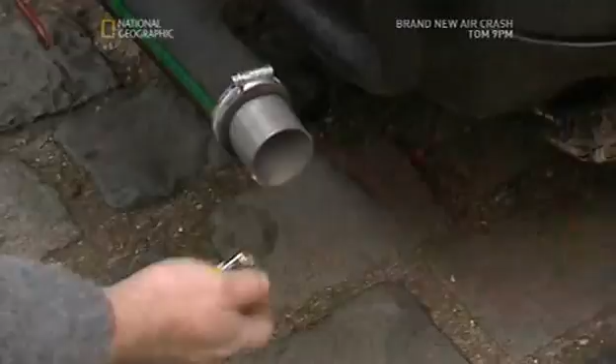But will they see the wood for the trees? Or simply get lost in the urban jungle?

There's nothing on the battery.

Dick Strawbridge is an ex-army officer turned eco-warrior. Jem Stansfield is an inventor with a wild green streak. Two men on a mission to fix the world, one mechanical solution at a time. Together, they are the Planet Mechanics.

Dick and Jem's latest mission has brought them to London. They've parked up their horsebox and have travelled to town on public transport. The Planet Mechanics don't want to add to the 260,000 vehicles that use London's roads every day. Most of these vehicles run on petrol or diesel, giving the capital some of the worst air quality in Europe.

But this group of people are determined to fight back. They're tackling pollution by planting trees. Trees for Cities is a charity that aims to plant 1 million trees in time for the London Olympics in 2012.

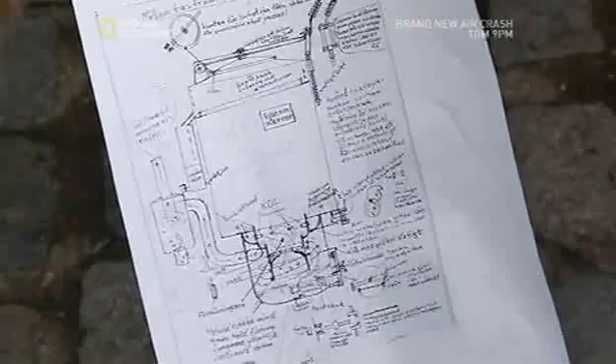Dick is feeling the pressure and is searching out some much-needed inspiration on the net. After a quick trawl, he's come up with a blueprint. But this plan does have one obvious drawback. Have you spotted it yet? Yes, the writing - it's Swedish. The chap who made this, it works, you know, this works as a system, but...

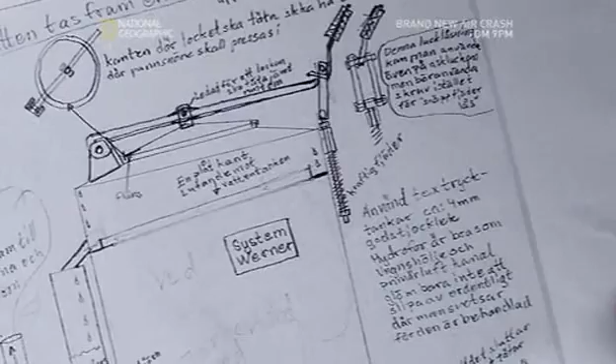There's a couple of things, Dick. It's got no dimensions on it. Oh, no, it doesn't matter. I don't know whether that's actual size. No, or whether it needs to be bigger.

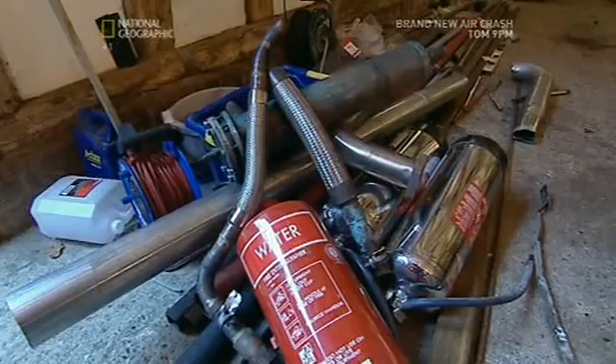Right, OK. So Dick and Jem have a plan in Swedish, a pickup truck and a pile of old junk. All they need to do now is build a car that runs on wood.

The Planet Mechanics have less than 6 days to make a wood gas pickup. And one half of the team is still in the dark.

Jem, I don't think you're overly convinced that we could get gas from wood, mate. I think it's brilliant, it just seems a little bit unlikely. But it's not that difficult. Look, watch this - it's a little cooking gas stove, a kettle full of wood.

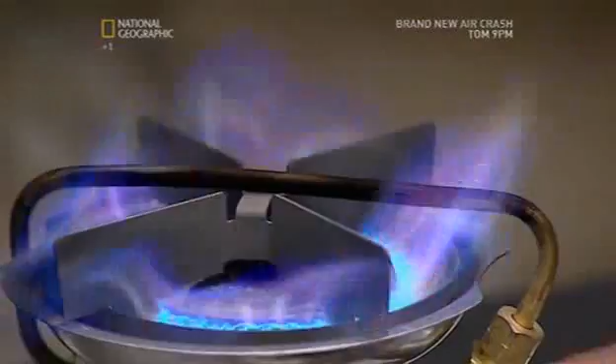OK, that's it. If this works, Dick, I'm kind of halfway to believing the car might work. What happens next? We wait for it to heat up and then gas will come off it, and then you'll be able to light it. Well, it's pointing at you.

Is this going to be the same with the car, though? You have to start it a day before you want to drive anywhere. With a bit of luck, we might get a bit more heat than we're managing here.

Right, I reckon we're nearly ready to try lighting that. Hey, look at that! That's properly amazing. I'm a complete convert to wood gas now. OK, that's a thing of beauty.

No, Dick, this is what we want. Hey, convinced? I'm totally convinced now. All we have to do is scale it up and run the car on it. A kettle scaler - I've heard of them.

Dick's proved wood can produce gas. But powering a pickup truck will involve a whole load more than filling up a kettle.

Day 2, and Dick and Jem are keen to get building. Trees for Cities are expecting the delivery of a green running machine for their big planting day at the weekend.

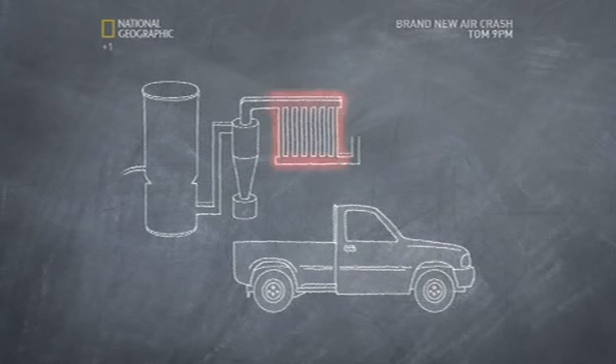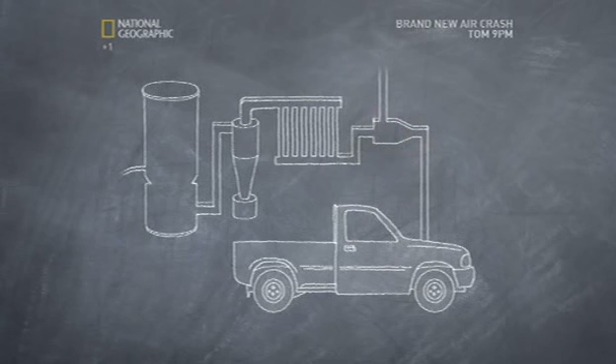First of all, they'll need to make the producer, a cylinder in which wood burns to produce the gas. Burning wood produces clouds of fine particles commonly called smoke. A filter is needed to get rid of this smoke by cleaning out particulates such as soot and ash. A radiator will cool down the gas, which could reach temperatures in excess of 700 degrees centigrade. Finally, before the gas enters the engine, it must go through a mixer ensuring the right balance of gas to air.

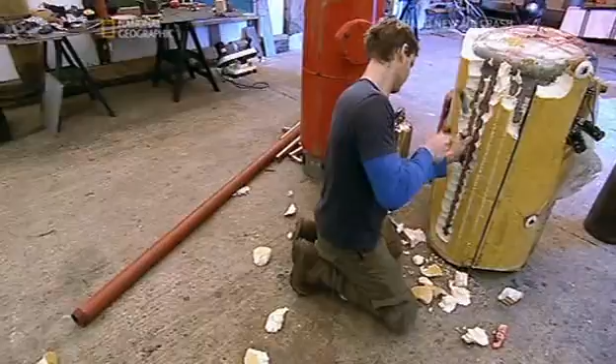This job is going to be a masterclass in recycling. This old water heater is being given a new lease of life. It will become the powerhouse of the system, the wood-burning producer. The thing is, all that's going to have to come out.

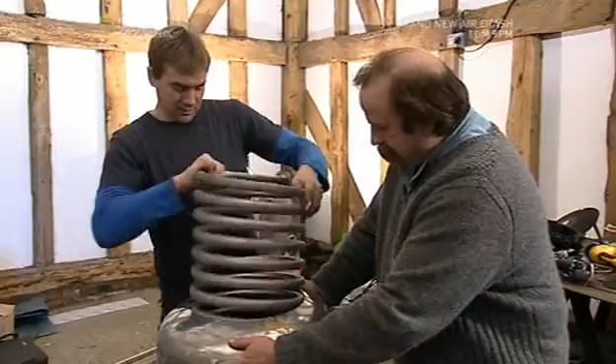It's a good-sized fuel store. Yes. Just not a good-sized hole for it. Oh, there must be something to do with that.

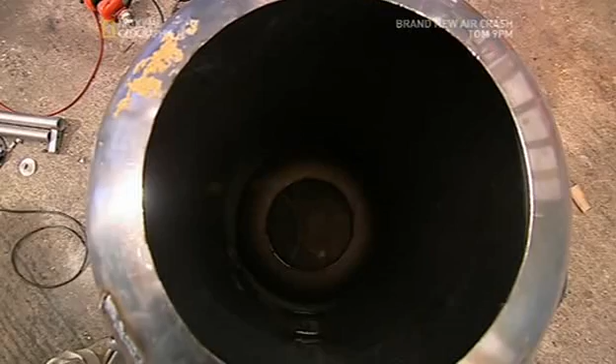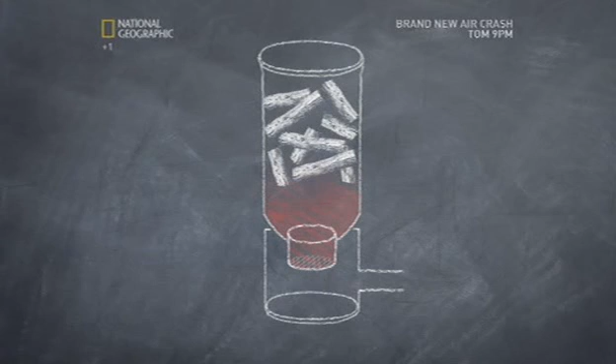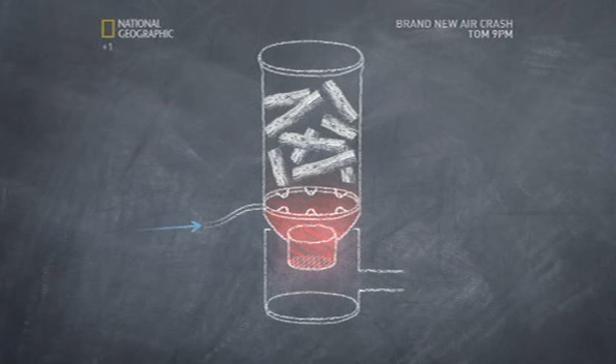Fuel will be loaded through this hole, but the real action happens at the bottom of the cylinder, the burner. Wood is stored in the producer and a fire is lit in the combustion zone. The fire is fed by air drawn in through a series of intake nozzles, ensuring a circular, even burn. As the wood burns, the process of combustion converts it into charcoal, gas and smoke particles. When the pickup's engine is turned on, the superheated gases will be sucked out of the producer at high speed.

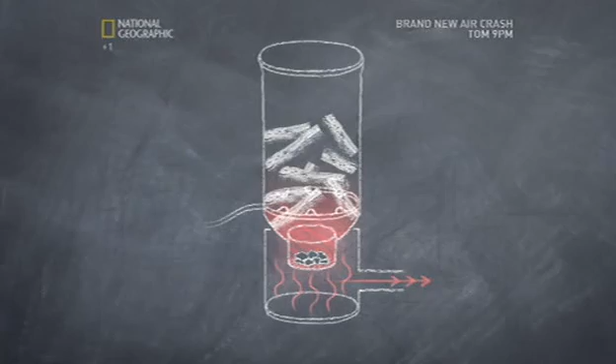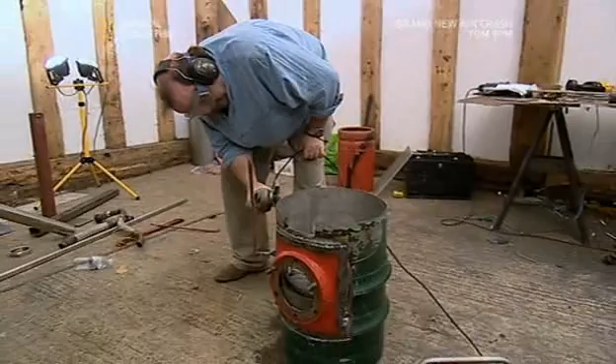Dick's making the burner from an old beer keg. He's cut out an access hatch in the burner to clear out waste ash. The charcoal will sit on this grate. He's fitted a handle to the outside of his beer keg burner. A quick turn will shake up the settled ash and should ensure a strong, steady, high-temperature burn.

This is the bottom bit's done, mate. This is where we can get rid of our ash. We can still take it out from there, so we can just keep it going in continuous motion.

The guys take a break, and now it's Dick's turn to have doubts. I'm really worried about the heat we're going to generate in the middle of this producer, and the metal we're using doesn't seem very thick. Well, as long as we don't get the temperature up to the melting point of the steel, we should be fine. Yeah, but the thing is, we're sucking air over charcoal, and that's how they used to melt steel in the first place. Right, I hadn't thought of it like that, but that is hot then, isn't it? Well, that's the thing. If it doesn't actually melt, but it just gets hot enough that it loses its strength, the whole thing starts falling apart anyway. The only thing I can think we can do is get the thickest, strongest steel we can find for making that central crucible in there and just kind of build it from there.

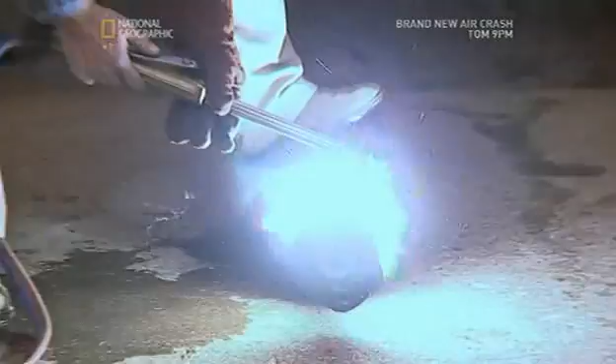Dick's found the strongest piece of steel in the barn. This old oxygen cylinder is so tough he's struggling to slice through it. But will it be able to take the heat of the combustion chamber?

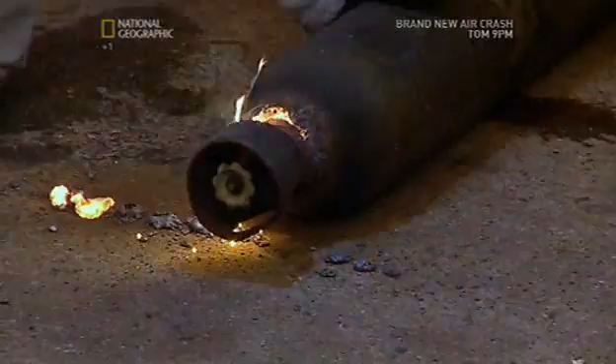As the light fades on day 2, the work carries on at a furious pace in the barn. The guys are determined to press on and produce that gas producer. Dick, how are we doing?

So, all the air nozzles, so we've got ourselves a combustion zone. Right, it's the other way up. Yep, so all the wood drops into this area. Yeah, and then where the air's coming in, that's where it burns in there. Suck it in through here. And if you've got the big bit, so this is our hearth. This must be hot. Yeah, so once the wood's burned, then all the gases, really hot gases, come down here.

This is the reduction zone where the high temperature chemistry takes place. Those hot gases then become flammable gases. Vroom, that drives the engine.

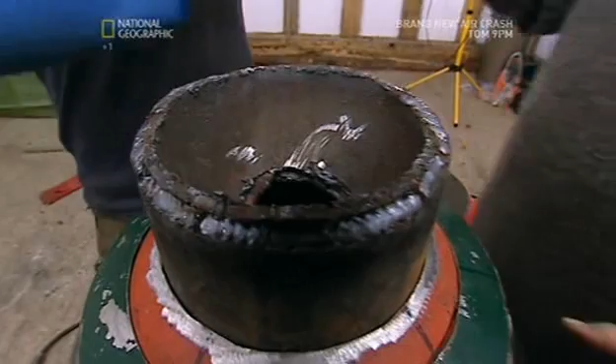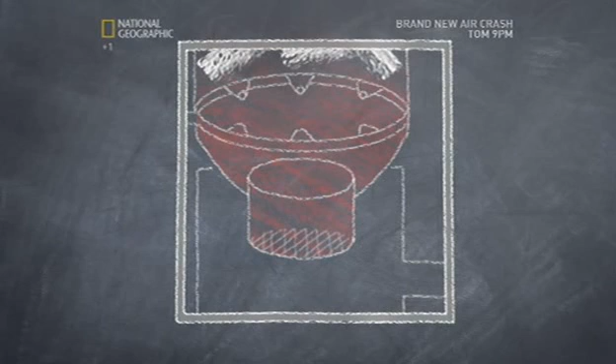Gasifiers are highly efficient. Unlike steam engines, which waste energy up a chimney, they are sealed units which chemically process their own exhaust gases. Wood is a dense solid fuel which produces large volumes of carbon dioxide and water vapor when burnt. All this gas is sucked into the reduction zone.